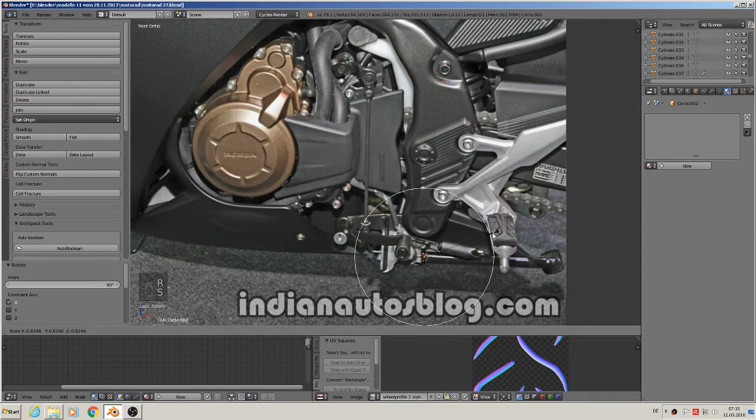Add mesh circle, rotate X 90 degrees, scale down. Edit mode, extrude to Y, extrude scale a little, extrude to the Y but in the front, extrude scale for the rand there, and extrude to bring it back and scale down. That is the base mesh, the rest is texture.

So we close here this inner hole with F, close the back hole with F. Then we have to bevel these edges, so Control B, move and roll like ever. We've done that often in this tutorial, so you know what I mean.

That one here needs it too. What is here? We have started, so I have to close. We haven't closed it, so okay, then it makes sense. Good, we've done that, we can take a smooth on.

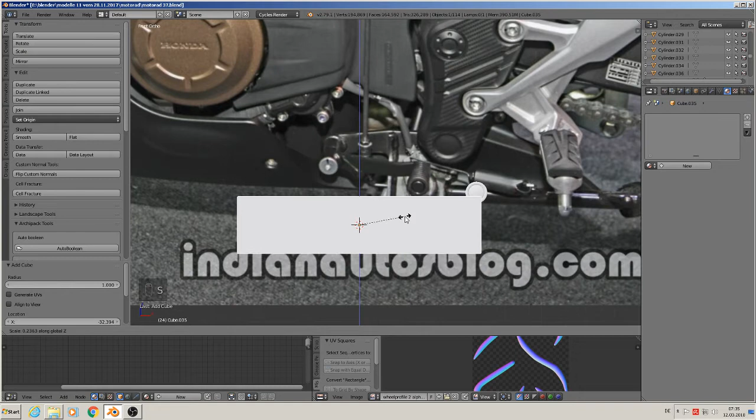So add mesh cube, scale Z, scale X, then there is a leaning to that side, and it is to fit in the Y, so scale Y is a little thin thing, and it bends there, so we have to do that too.

Control R, make a loop in, bring it there, and then we get the rest, but with background selection, and bring it a little bit to the Y. Good.

I know the things ever round at the end, so we have to do there 3 loops and then get them

simply out. Scale X. Oh, we have background selection, okay, then it should work. Scale X, and then this 2 scale X, and then we have some round looking thing there, but it isn't so important because there are other things before and so on.

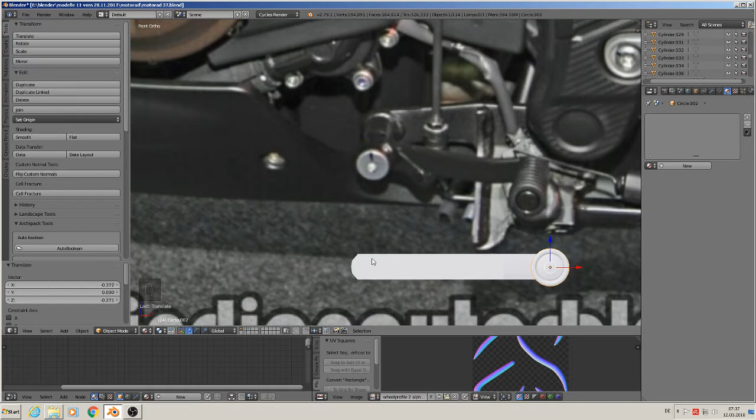So we grab it and bring it there, put to position. Then we have here a cylinder that is built with them, and the rest there. So

Add mesh cylinder, 24 is okay, scale down. We make only this part and this part and this part, okay. So rotate X 90 degrees, scale up. Think a little bit smaller.

That can handle that. Good. We look, that is in the middle there, so top view. A little bit more there. Smooth on it. 2 loops in. Scale Y.

Good. We have here a plate between them, so we have to do them. Take that face here, extrude scale, extrude to the Y.

Wow, what happens here? Control Z. Extrude to the Y, I said. So, okay. Extrude scale, a little bit up. Extrude to the Y. Extrude scale a little. Extrude to the Y. Extrude scale. And extrude. And F to close. So, that is that.

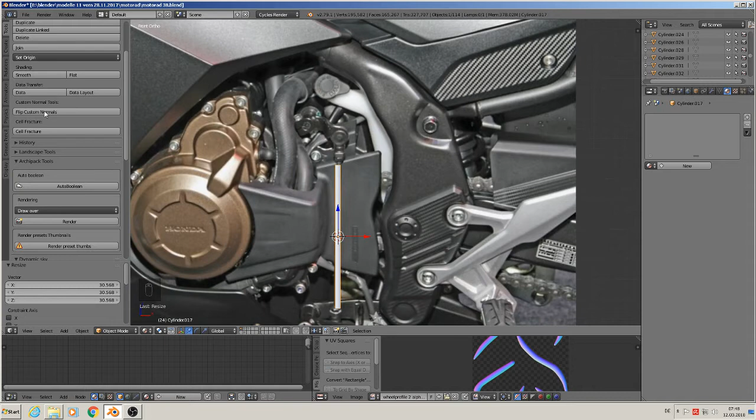Then a 6 counted one, so add mesh cylinder 6. Scale down, scale set, scale and complete, scale set, good, a little bit smaller, and extruded. Shift D duplicated, and scale set to bring it a fatter one.

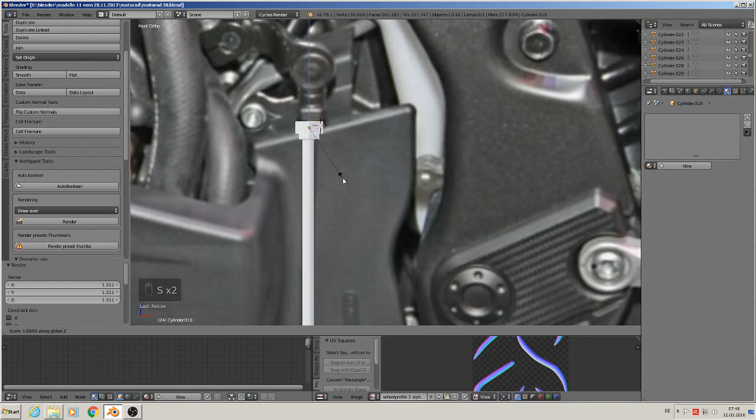Look what is down there - there is a small one, so we get Shift D, the small one down, and there are 2 cylinders. Here's a cylinder, there's a cylinder, so we take a cylinder. We simply take that cylinder, Shift D, and scale set. Scale in the hole, and scale set. So we have that.

That one should be down there too, so Shift D, make a copy, bring it down to here. It can be a little bit greater - that is okay, yeah good. We done that. So we need that here - we can take this cylinder, Shift D, rotate X 90 degrees, scale up, plug it there.

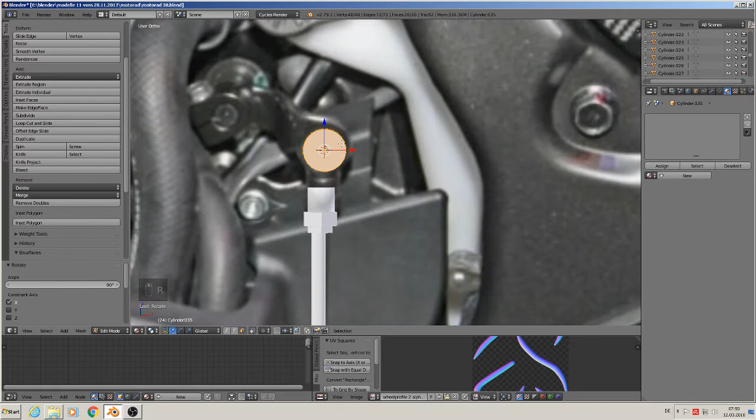It isn't the best one, but yeah, that is too few verts for that. You see that directly, that isn't round, so we delete it. We need here something that is round, so we add a cylinder, and we take 24, scale down, scale Z, scale in the hole, rotate X 90, we have it, grab position, bring it in front.

Then we have to bevel the edges there. Without beveling you will never get a good light effect on an object, so always bevel there where you see. So our beveled, okay, that is good, so we done that. But we need here this thing and the rest there. Wow, much to do.

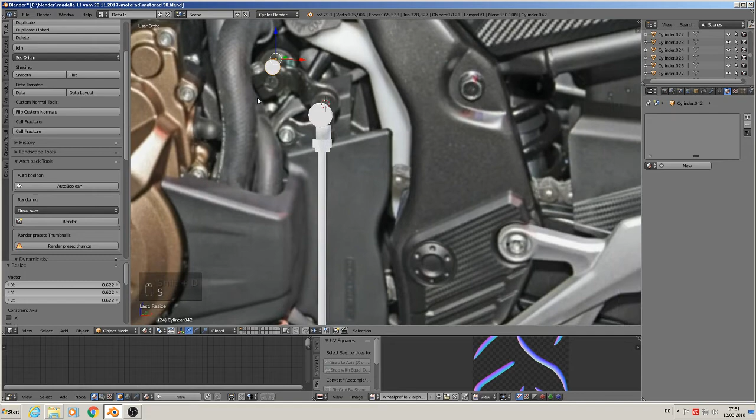So at first we make the cylinder that comes out from the motor. Shift D simply and scale down, bring it down, and make it a little bit longer. So we can take Control Plus and bring it more out to the motor. Then we can bevel that again. Good, smooth on it, thanks a lot.

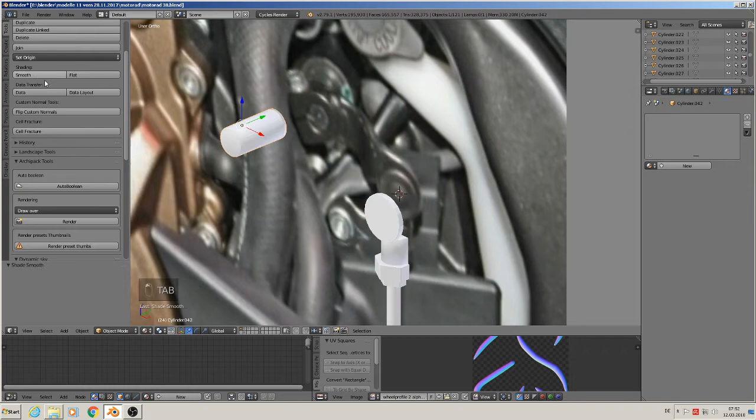So, grabbing, we need this out-of-screw, that is other than the others. So Shift D, we take that one here and bring them a little up. So we take that both, bring them a little up and scale down. So we got something like that. You can make there and smooth on. We get the 2 loops in.

And we need a 6 counted one there, so Shift D, make a copy, rotate X 90 degrees, scale down, bring it in front. And we have that type of screw there, and we need them not only there - there are many places where we need them later. So that should be that.

We join them together as one, and Shift D, make a copy so that we have them forever. When we search them, we grab them and bring them to all the screws that we have, and scale them up so we have the next type of screws there, and we only need to select them, and then we have them. Good, fine, save.

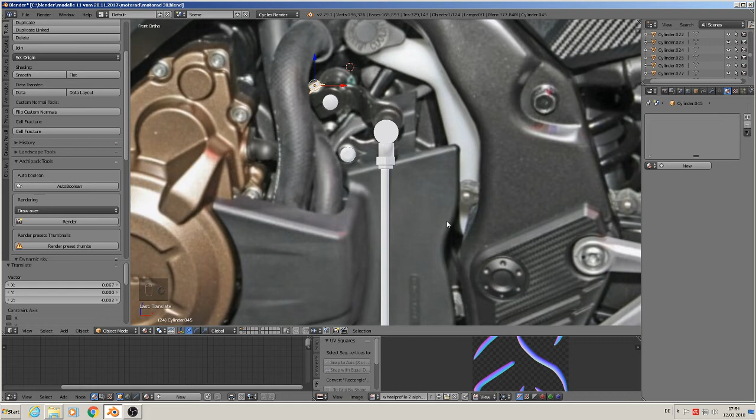Then this one must be done. So we take the same cylinder, Shift D, rotate X 90, scale up. No, that is too few counted, so we take the top one there, that is with 24, that is more okay for that.

So we need to go back there. What is that in the Y? Okay, so we take another loop in. We take the front two loops, make them a little bit smaller, and in the middle comes another one out there.

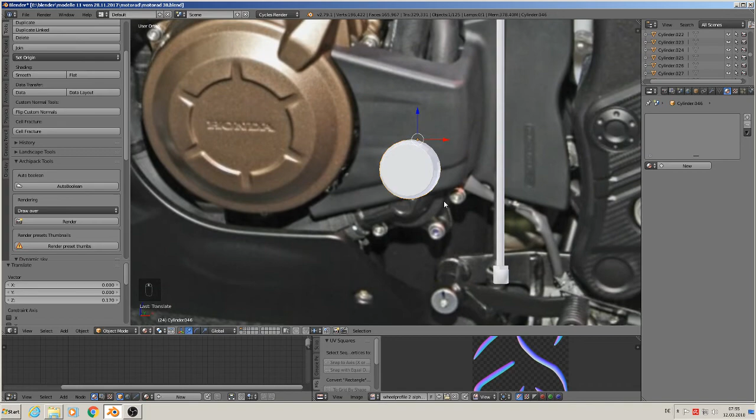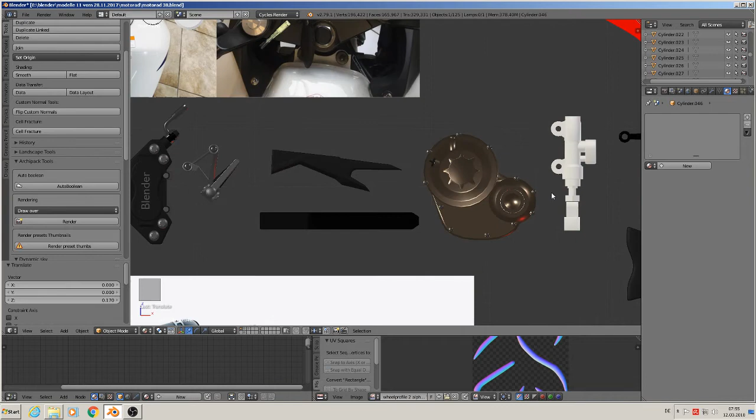Okay, so that means we need that one with screws there. Moment, we've done that one before, so I know. We must look. I think it was here, or no, there's other stuff. But this one can go. I must look, so we make it again.

Eagle. So Shift D, we make a copy here. We scale them down, bring them into the material, get back here.

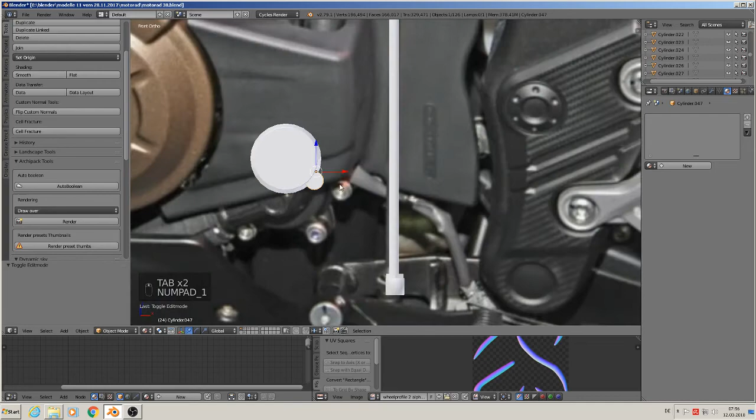Bring the whole thing in front. We need to bring out some there. So when we go into edit mode, with border selection, then we can delete minimum the half. So we delete them, and then we have to go to a straight line.

Okay, so we take that one and extrude it simply into the float, and the same here, extrude and be in the float. Then we can connect them both and close that line here.

So, but we have doubles here, I see that. So, better to cut one of them. Better this one. And close it again. Then we close those things there.

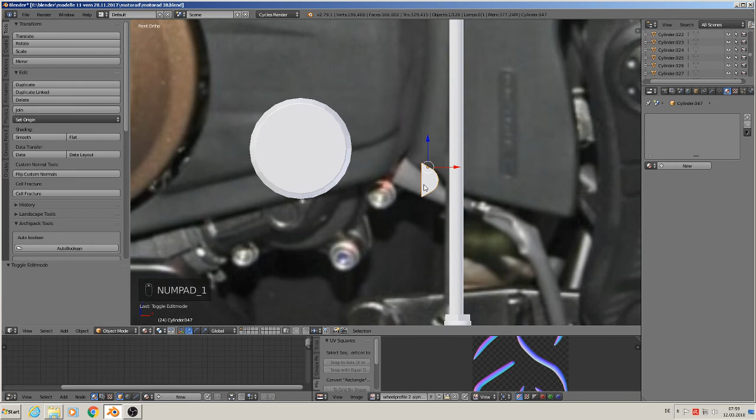Okay, so we got that. Eagle, how it looks. That is that, what they do there. So we take this face and extrude it one more time, so we have more space to bring it in.

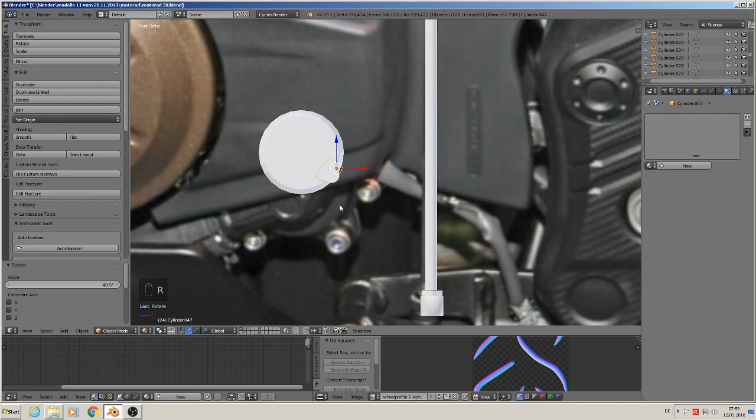Good. Grabbing, positioning, rotating, and bring it into the material. So that is that. Shift D, there one, rotate, bring it in. Shift D, bring it there, rotate, grabbing, positioning. Thanks a lot.

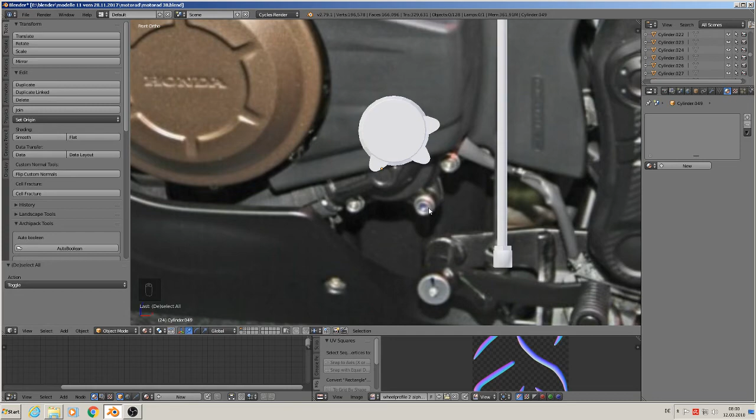Good, those are same screws as before. No, that is a 6-counted one with another down under it. But we take simply a 6-counted inner one here. So that one, Shift D.

We were there, so we go there. Scale down, grabbing, positioning, bring it in front. Good. Shift D to place one there and one there. Done. Good. That should be that, but there must come something out of it.

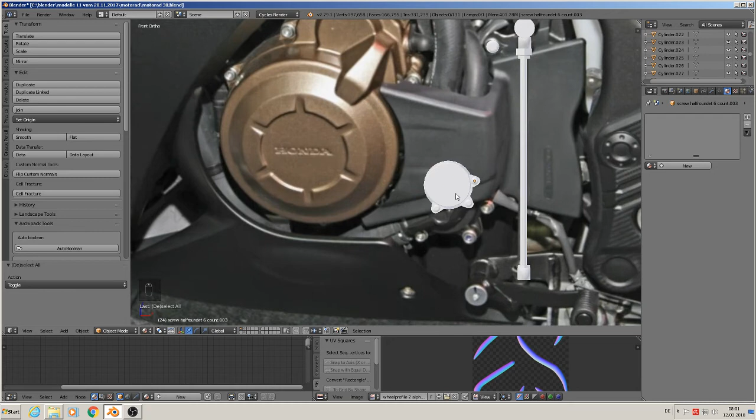So we have to get that here, but only the face. Okay. Extrude, scale to that point. Extrude outward. Scale to the middle. Then we have to round that out.

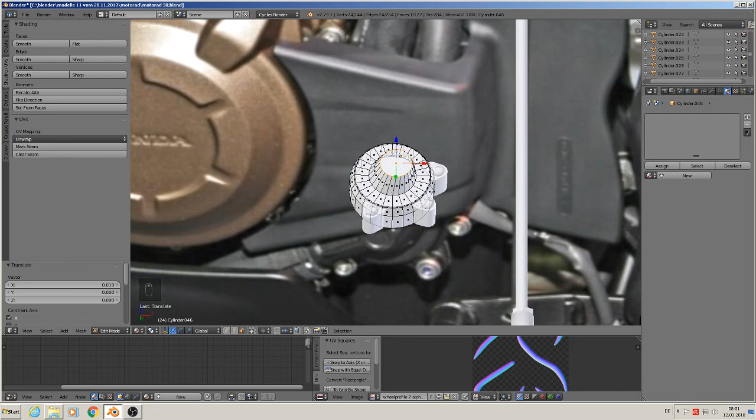So that means we need enough space for that, but Shift D, we have that. We rotate, set 90 degrees. We scale that down and extrude here. So we have that thing there that comes out.

And yeah, now we need 2 loops in here. Control R, 2 loops, scale X. Should be a little bit greater because we have the distance between that and the rest there.

So we take that here and select, checker deselect. Then we have each second one, extrude, scale down. Then we have that. Good.

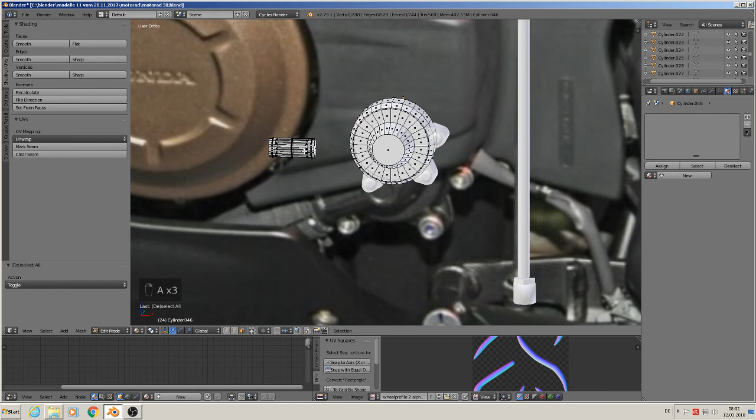With L we can take that whole thing there and bring it there, and we rotate to the direction there and bring it into the material. So we have that.

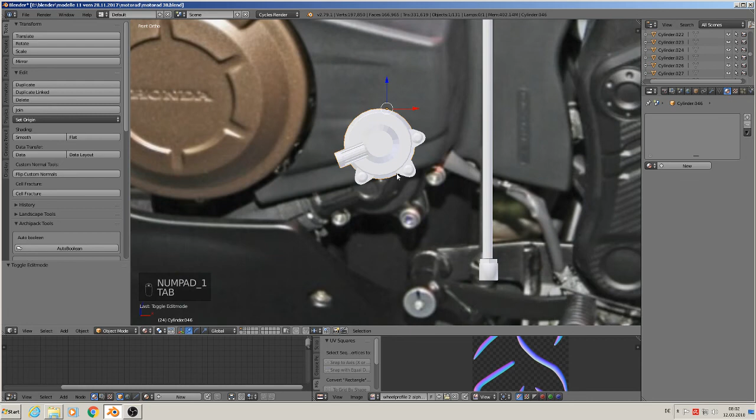Good, that looks good for me. So in this moment we will maybe later change some of that. Let's move on. We have surely to make those loops overall like everything.

And we have to bevel to get that nice effect on. But here that should be closed and give a bevel on it.

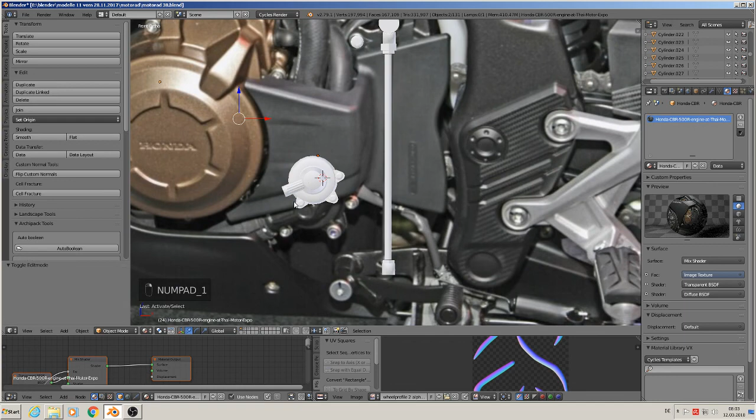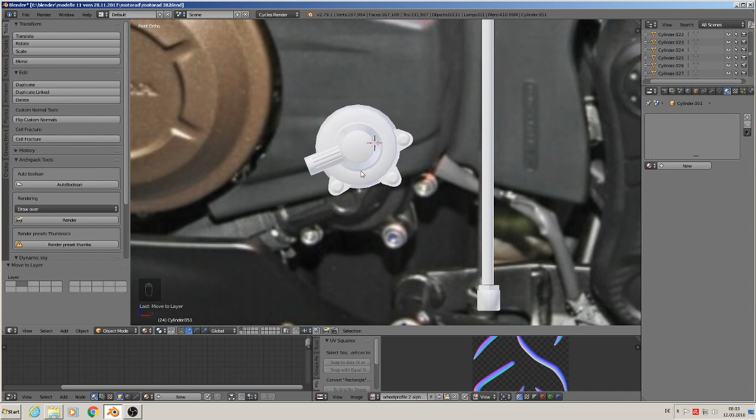Good. Then we take this whole thing with all screws, all this stuff there. Shift D, make a copy, M, move to the second layer. Done. Then we see we have a hole in, so we make the fastening hole in.

So we get this one, extrude, scale and extrude, and put it a little bit to the wire. Good, that one should be flattened, so we flatten it. Good, now we join them all together.

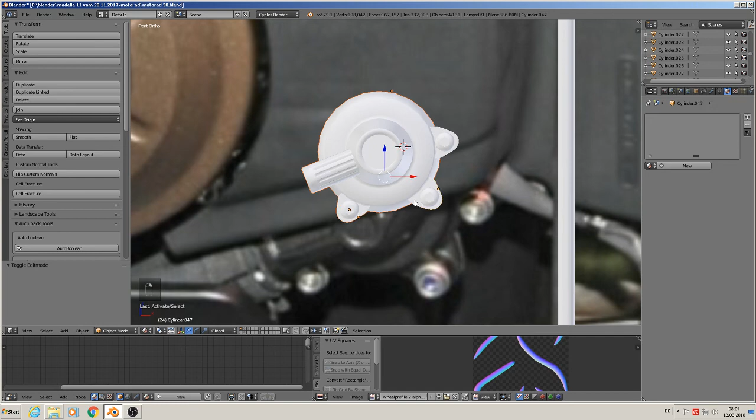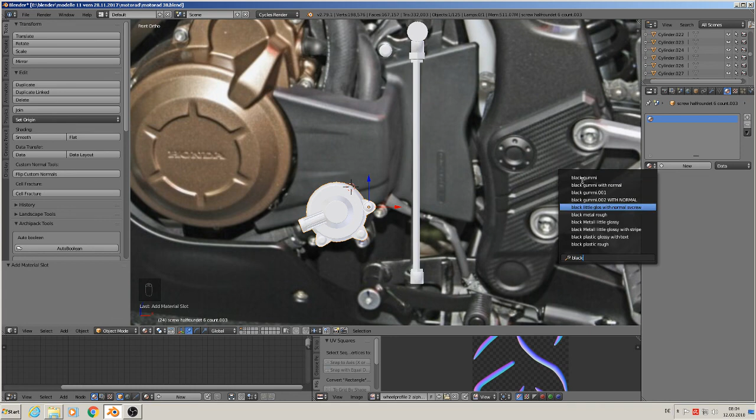So join, and we have that black thing there, and we can handle and edit it like we would. That is black plastic, so we give it black plastic rough.

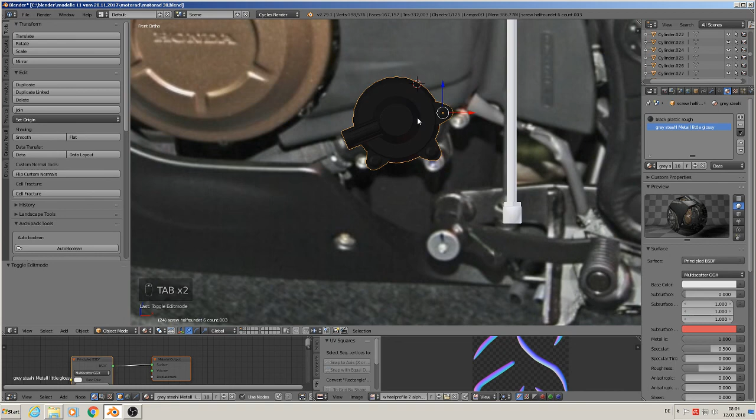And the screws, that is more metal-like chrome, so we go to steel, little glossy, and we give it to the screws. I think, okay, only on the screws. So screw here, screw there, screw anywhere, and the side.

Good, done that. File, save as, give a new version number. Then we are secure from errors, crashings, and the rest. Good, we've done that all.